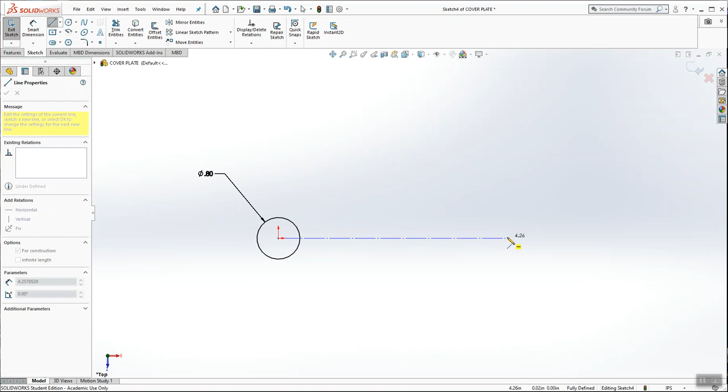Now I'm going to use a center line. So just below the line command, there's a center line command. And I'm going to draw a horizontal center line. So not an angled line, but a horizontal line off to the right. And I'm going to smart dimension the distance of this line to be 4.8 inches.

And then I'm going to draw another circle and make this one equal to the diameter of that one. So make sure both circles are selected and then choose equal and hit the green check mark. Okay, now I want to do the same thing, just slightly lower. So I'm going to draw another circle just off to the side, so to the left of the origin and below the origin. I'm going to make that circle equal to the diameter of this circle so that they're the same size as well.

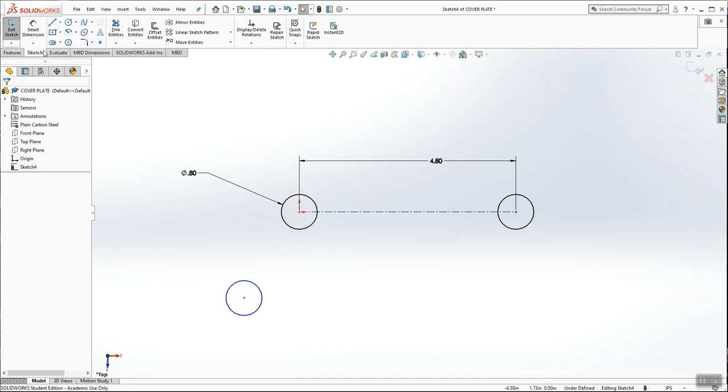And then I'm going to dimension this circle's location. With respect to the origin, it's 0.6 over and 2.3 inches below. Okay, so now this circle has a home with those two dimensions.

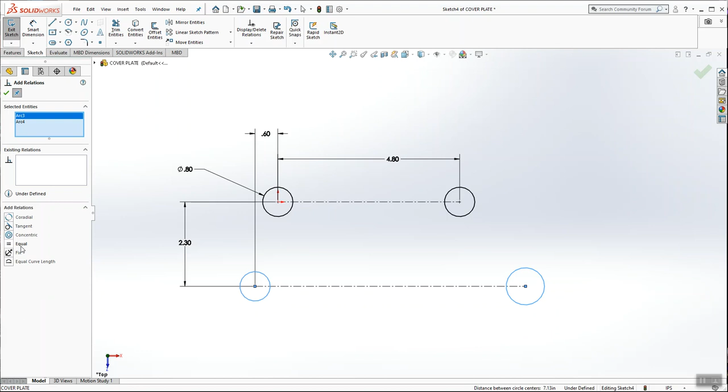I'm going to draw a center line over, way off to the right. I'll glue a circle to the end point of that line and then make an equal relation between this circle and this one. And it doesn't matter which circle, by the way. If they're all equal, it doesn't matter which one you select. And then the distance from here to here is 6. So now all 4 circles have been dimensioned. I used some construction geometry to help.

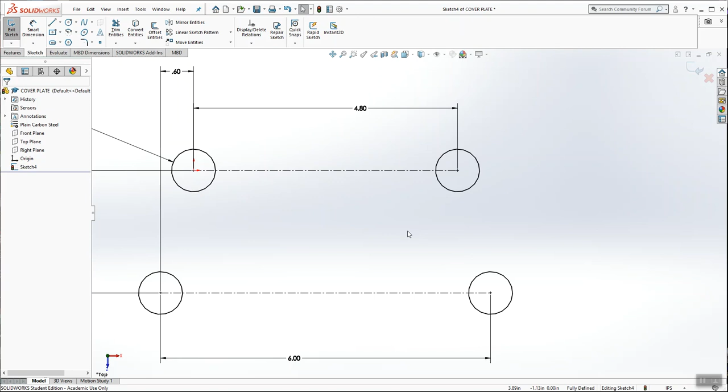And there's a couple of ways to get this shape drawn. And we are going to use a technique that I hope you like. We're going to use a combination of trim and circles. So I'm just going to do the same thing over and over again. I'm going to draw another circle on top of this one, but it's going to be larger. Same thing here, same thing here, and same thing here. So I want to make all 4 of these equal, so that when I change one, they all change.

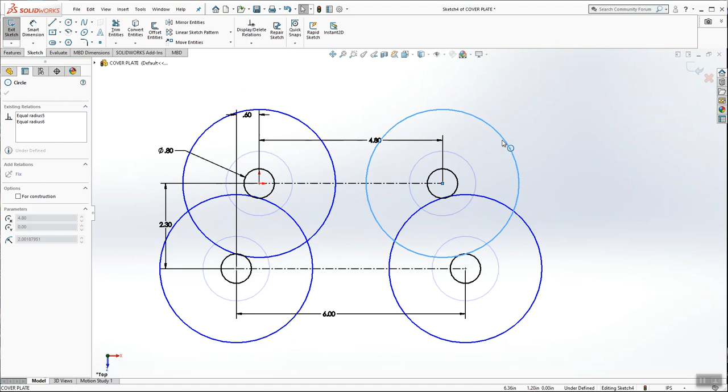Okay, now I'm going to start on this side and kind of show you what I'm going to do. I'm going to draw a line, it's a slanted line, but it's not going to touch either of the circles. So just kind of draw a slanted line off to the side. We're going to add a relation between this slanted line and one of these circles, let's say the top one, and say tangent. Tangency is a relation that I'm going to have to go over during one of our Zoom meetings.

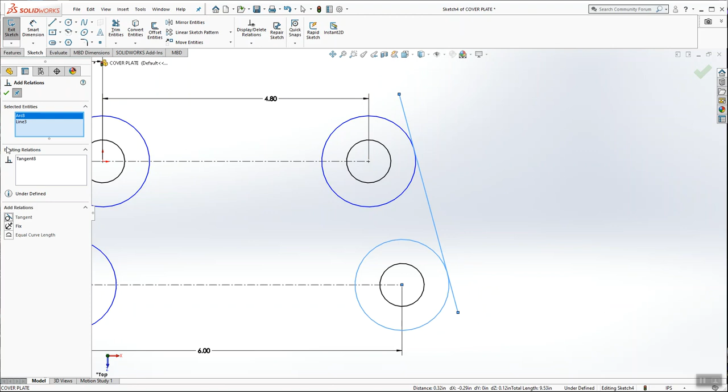All right, so I'm going to do that again. I'm going to go to add relation, choose this slanted line and this circle, and say tangent. Now I want to kind of zoom out, zoom over, and do the same thing on this side. Draw a slanted line, make sure that the line is tangent to both circles. Like that. Okay. And now we're going to draw a line from here, this intersection where the circle cuts through the center line. There'll be a little point there. I want to draw a line right on top of it.

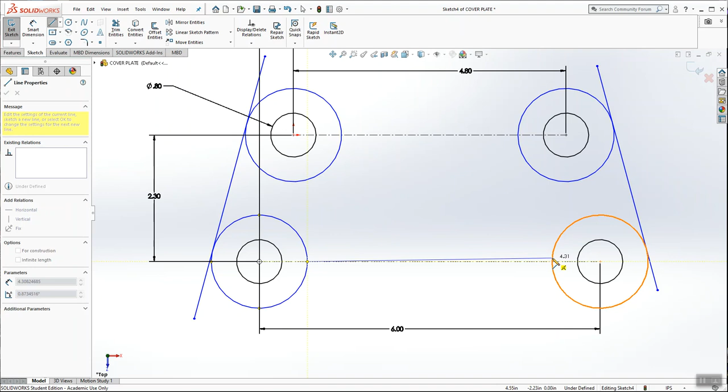Okay. And now I want to use the trim command and trim some of these excess lines that are sticking out. And the trim command is going to act like a pair of scissors. That's why the icon looks like that. And we're going to be using power trim. In fact, I've only used power trim for the past 15 years. I don't even know what these buttons do. So power trim works fantastic. All I have to do is hold my left mouse button down, and wherever I drag my cursor, it's going to trim whatever I drag my cursor across.

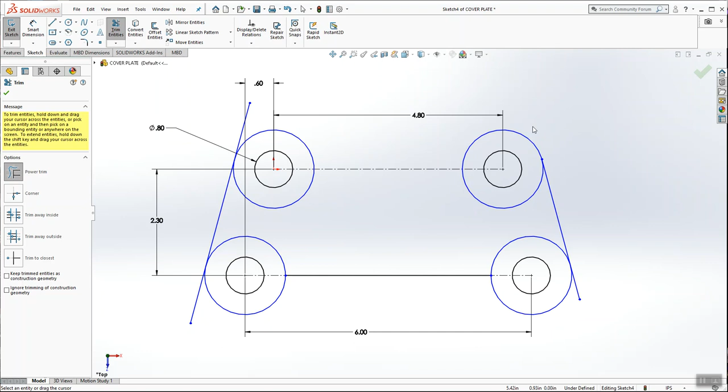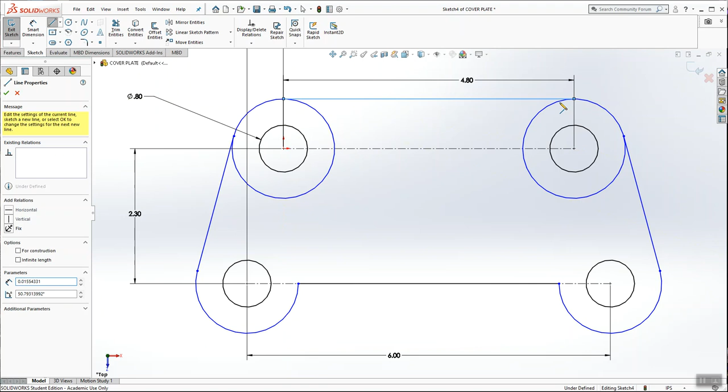So I can trim that line. I can trim that line. That one. That one. That one. That one. And now I forgot to put a line across the top, and then we can finish this shape with the trim command. So I just drew a line from the top of one circle to the very top of the other. And I'm going to try to trim away all the stuff that I don't need.

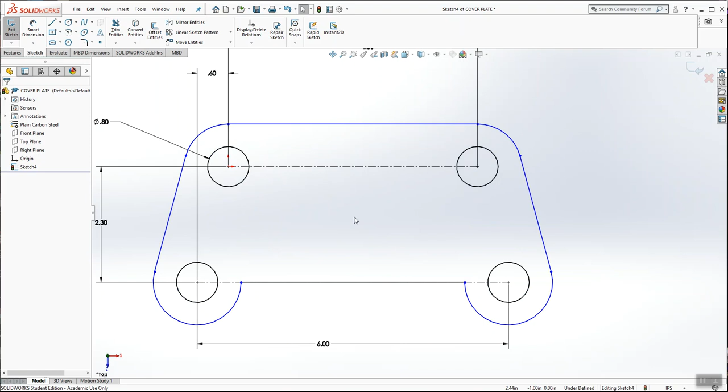Don't drag your cursor across a center line though, because if you drag your cursor across the center line, let's see, I don't even want to do it. It'll ruin your whole sketch. So try not to drag your cursor across one of those. So using the circle command and a couple of lines, I was able to use trim to get this shape.

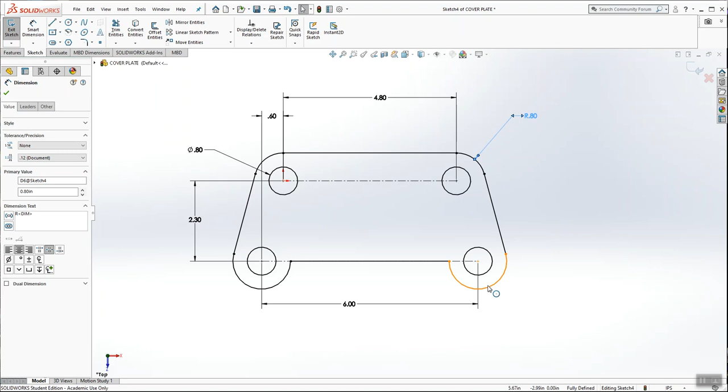Let's see. Let's start adding some dimensions. I believe this radius is 0.8. Oh. Well, I couldn't add my 0.8. That was weird. So it let me add the radius to this arc, but not to that one. I'm not too concerned about it. It looks great. And the last thing I want to do is add a little fillet between these corners.

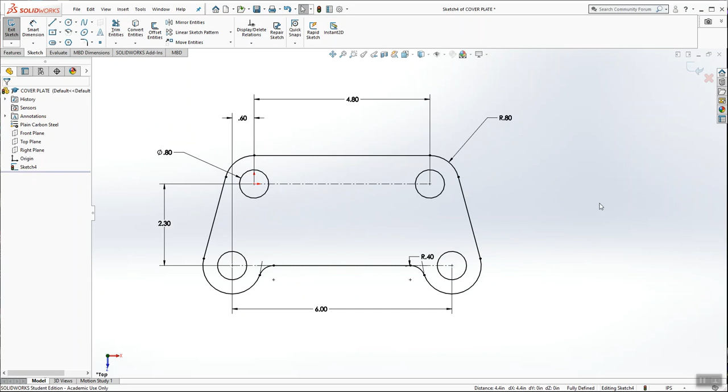And according to page 20, it says 2X R.4. So I'm going to use my sketch fillet tool, punch in 0.4, and then select these two. That's okay. Select those 2 points. So that looks good. I've got all my dimensions. I have my geometry. And now I'm going to switch over to the isometric view just so I can see which direction I'm extruding. So I'm going to finish my sketch.

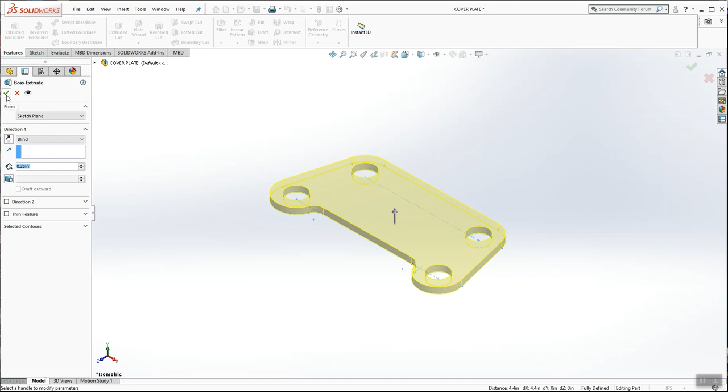Go over to the Features toolbar and make sure that your sketch is selected over here in the Feature Manager, and click Extruded Boss Base. And my distance before was 1/4 inch, so that's what it's going to stay until I change it. So here it is. Here's the cover plate. Plain carbon steel, using the same techniques we used for the base plate and the offset link. The next video for week 2 is going to be the carburetor gasket on page 20, Interpreting Engineering Drawings.